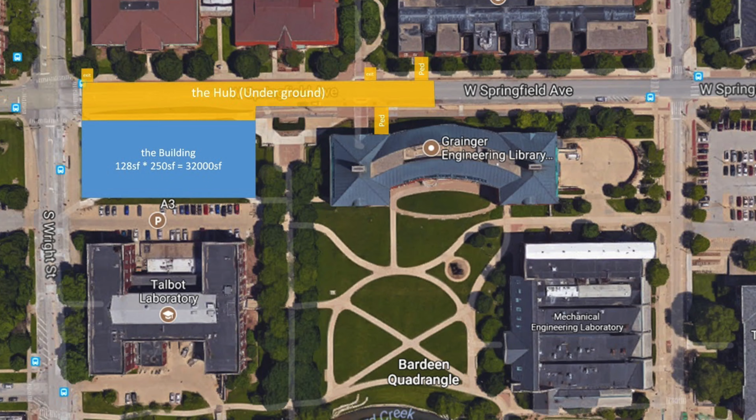For the management plan, our team developed a series of 5 logistics plan views that show progress on the ground, starting from mobilization and excavation all the way to exterior cladding and interior finishing.

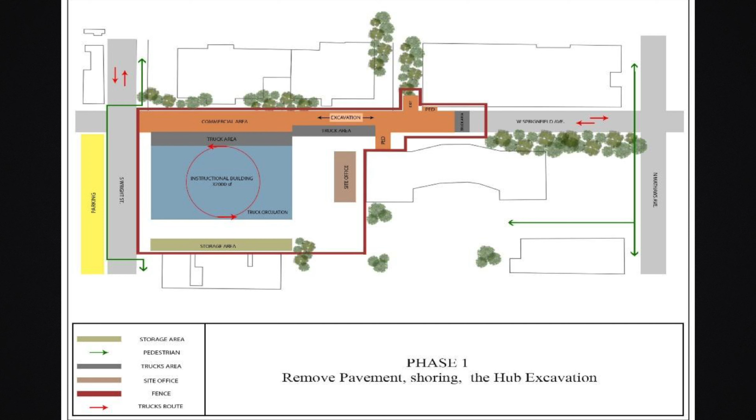Phase 2 is where we extend the excavation work to the building, and foundation work for the hub starts.

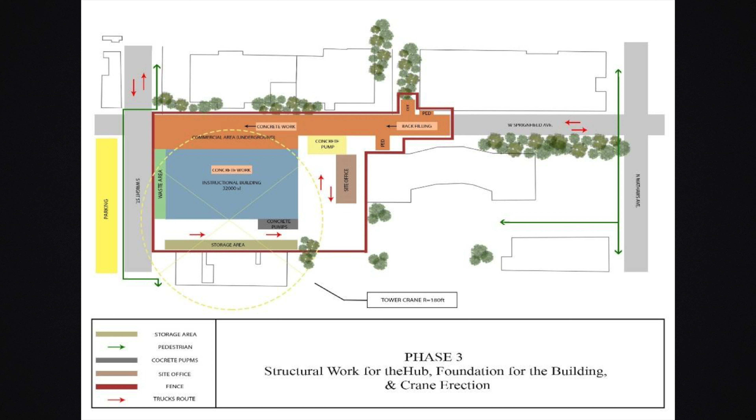Phase 3 focuses on structural work for the hub that will proceed from east to west. While the structural work continues for the hub, construction of the foundation for the building will start after the excavation finishes. We will erect a tower crane on the south side of the building that can reach a radius of 180 feet, and mobile cranes could be used as well to reach areas that are hard for the tower crane to reach.

Phase 4 is where we adjust the boundaries and open the pedestrian path along the west side of Grainger Library. In Phase 5, we will construct the concrete slab that will cover the hub. Backfilling and paving Springfield Avenue and opening up for the public will happen in this phase as well.

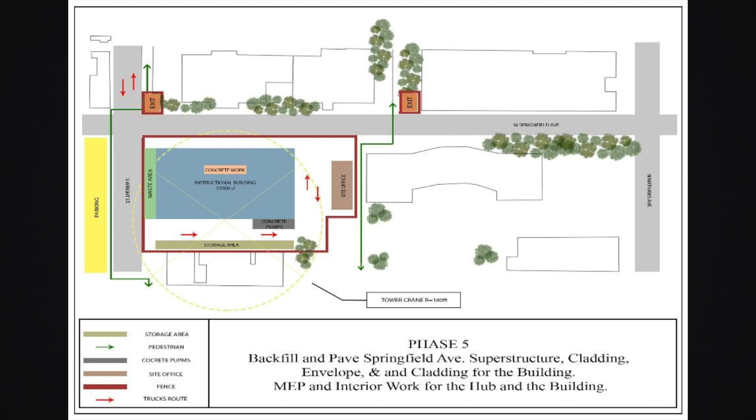Cladding and envelope activities for the building will be done when the superstructure is fully erected. Interior work and MEP for both the building and the hub will occur in this phase.

Taking into consideration that all engineering students at Illinois are in grave need of a commercial zone at North Green Street, the proposed layout of the hub is on the cutting edge of all new campus development, combining workspace with dining areas, and constructing meeting rooms with glass walls to create a sense of openness.

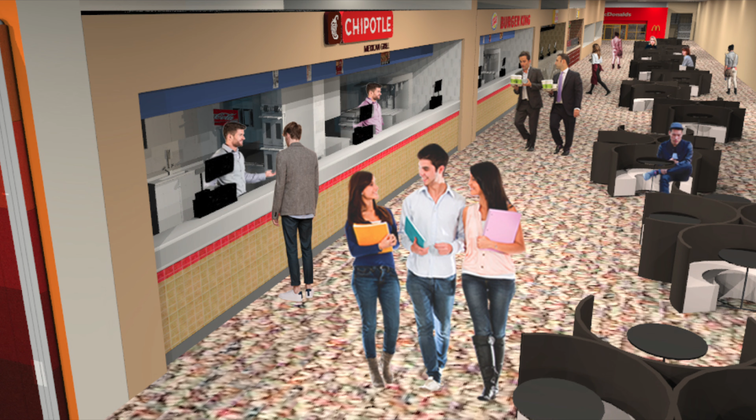Our designers worked to integrate all of these needs under one roof, starting with chain restaurants, study rooms, a classroom, and finally we have a relaxation and play station. And Pablo will now talk about the structure design.

Since this is an underground structure, we decided to use concrete elements. We will use retaining walls to work together with the columns and the beams to have stiffened frames that will resist the vertical loads from the road and the horizontal loads from the soil.

We did a preliminary design of all the structural elements in order to have an accurate schedule and an accurate cost estimation. We decided to have a foundation of concrete and a steel superstructure. All the footings will be isolated footings, whose depth and size will be defined once we have all the geotechnical information.

For our floors, we will use steel decks that work together with our secondary beams, placed every 4 feet. Our frames will have 30 feet and 27 feet spans. This regular distribution will allow us to build it very fast and keep all the activities on schedule.

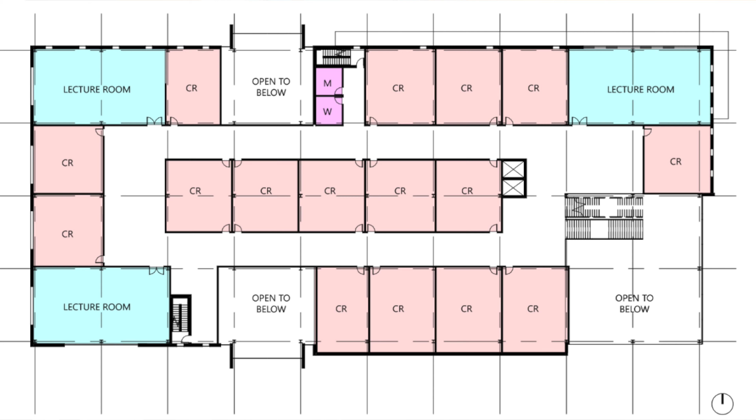As a firm that takes pride in practicing superior communication throughout all phases of the project, it's crucial that we work together with the client to incorporate the needs and wants for the project design. As such, it was important to develop a design that responded to and enhanced the engineering campus. The building incorporates over 50 educational spaces, including classrooms, lecture halls, laboratories, and an auditorium.

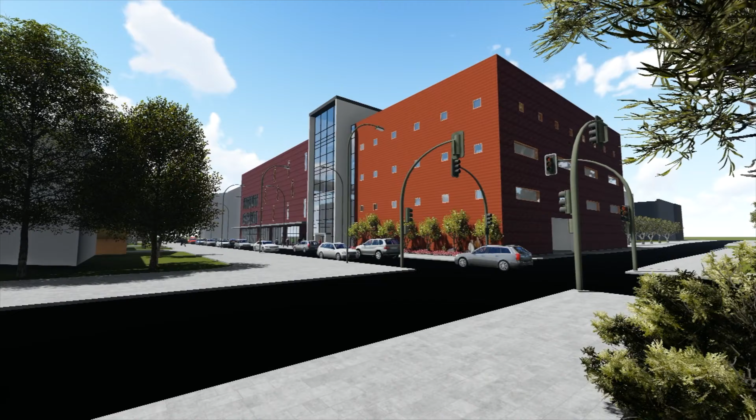Located at the intersection of Springfield Avenue and Wright Street, site circulation was an important design factor to consider. We propose to maintain the flow of traffic along Springfield Avenue by locating the loading dock off of Wright Street. Pedestrian access is maintained around the building's perimeter, and circulation is brought into the building from Springfield Avenue in a pedestrian plaza shared with Grainger Library.

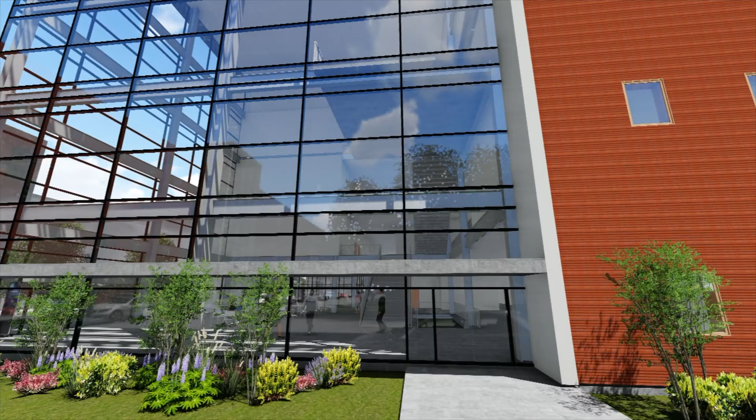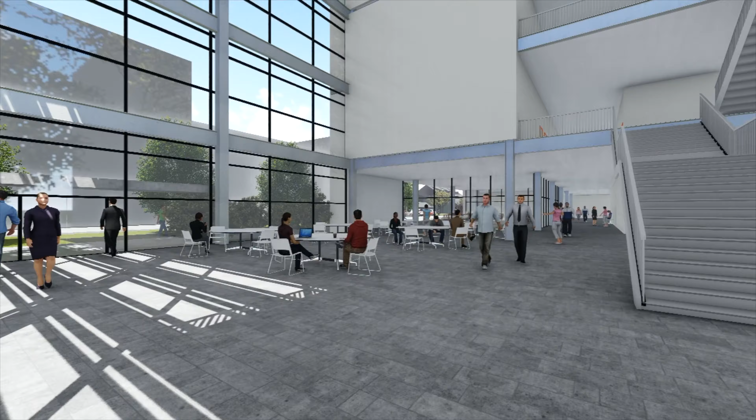The main entrance features a 4-story atrium that allows natural daylighting to illuminate the lobby, creating a welcoming space for students to study. A grand stair connects the atrium to the educational spaces. On the roof, an accessible roof garden creates a prime space for students and faculty to study or relax with uninterrupted views of the U of I campus. These design features help create a sustainable, welcoming instructional facility for students, faculty, and the community.

Working closely with our architect, Casey, we as a LEED team came up with a proposal that includes both design and management decisions. The key features and cost analysis for achieving a LEED Platinum building will now be discussed.

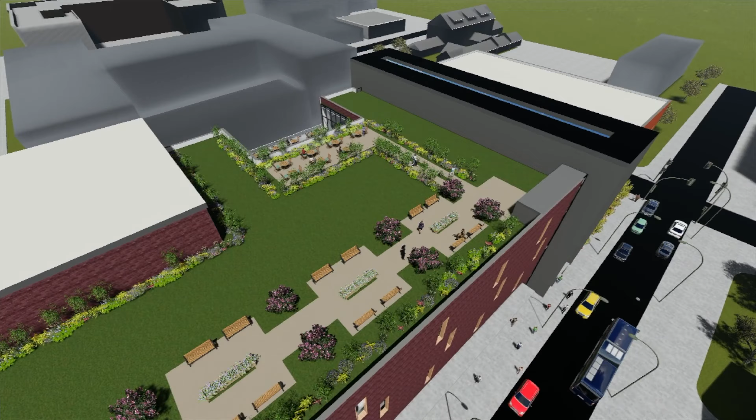For key features, the roofing system will include approximately half-green roof, which will be a vegetated roof, and have reflective TPO white roof with high albedo. This will allow us to have a combination of both roofs, which will make it not too expensive and will have the possibility of installing solar panels in the future above the TPO roof.

For the skylight system, the design includes one large window that gives natural light into the main auditorium, with the advantage of not having the high cost of multiple skylights.

For the landscaping feature, we are including native plants that will reduce the outdoor water usage, protect the surrounding habitat, and decrease the rainfall water runoff.

For the atrium curtain wall, designed with a triple pane glass system, will give an open and illuminating atmosphere into the building's atrium, will reduce energy uses and costs, and gives a new aesthetic and exciting feature onto the Bardeen Quad.

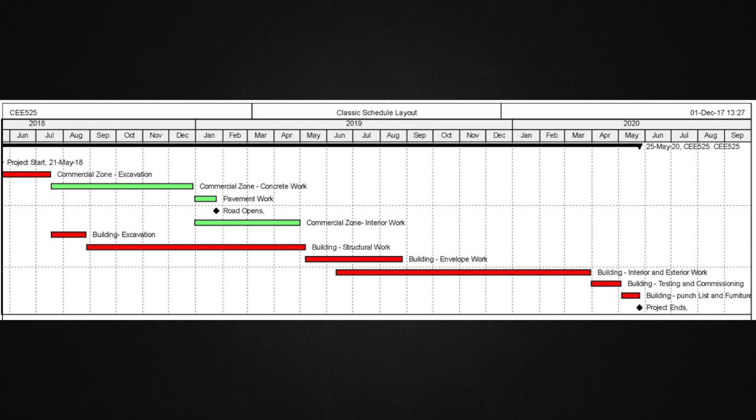Our planning team has also planned to fast-track the schedule by adding crews to minimize disturbance to Springfield Avenue. The work is scheduled to start by May 21st of 2018, and it's going to produce a total of 247 working days and 344 calendar days, finishing on April 30th of 2019. However, the road will reopen on January 24th of 2019, approximately 100 days prior to the end of the commercial zone construction.

For the building section, the estimate was based on our company's database along RSMeans 2016. With a total gross area of 160,000 square foot and LEED Platinum accreditation, the building's construction cost is $40.25 million US. On top of that, 15% is going to be added for markup, contingency, design, and LEED supervision fees, which provides total design build price as $46.29 million.

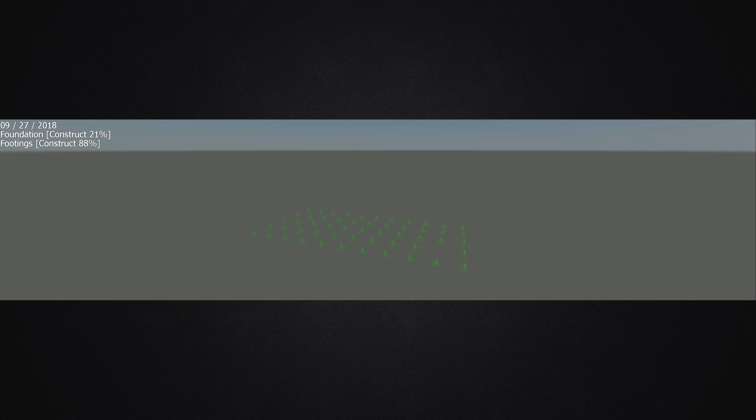Our planning team has estimated a total duration of 22.5 months for the building. That was broken down into sub-activities. The building construction schedule will start at the end of the earthwork for the commercial zone, and it's going to end on May 25th of 2020.

If you choose our team, your project will be gaining great values on design and construction. Some of our delivery considerations include: first, we ensure that Springfield Avenue can be reopened as soon as possible, since there are more than 10,000 vehicles passing through the street every day. This is possible since the project is driven by the schedule over the cost. In other words, we are willing to spend more money to reopen the road as fast as possible. We're also going to minimize traffic and pedestrian disturbance by designing temporary paths and drive-back ways.

Second, by maximizing the building area, our design provides enough places for commercial stores and other facilities for future demands. Finally, our team, composed of engineers, architects, and construction professionals, has broad experience, which will work together to deliver a value-engineered, sustainable product.

In summary, our team proposes that we can construct this project, the instructional facility, and the commercial zone for a total price of $51.2 million in a total duration of 2 years and 5 days, starting on May 21st, 2018 and finishing May 25th, 2020. We thank you for your consideration.